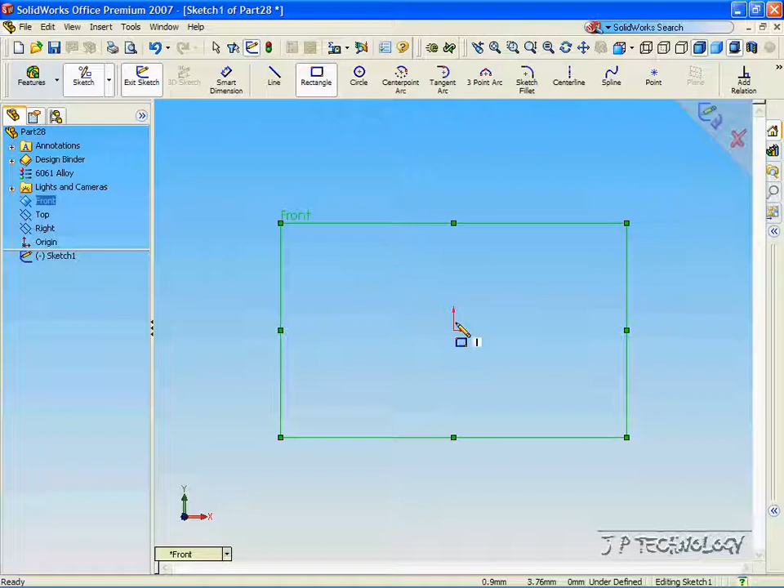Now to start off, let's make a shape that we will put all of our holes into. Click Sketch, click Front Plane, click Rectangle, select the origin, and select a point outside of it. With the smart dimensioning tool, let's make this dimension 100, and let's make this dimension 200.

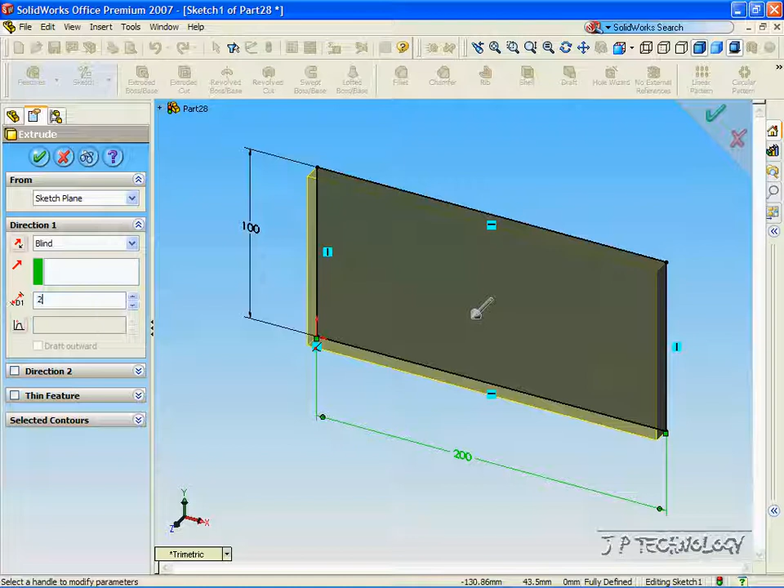Now let's click the feature, extrude base, and let's make it extrude out 20 millimeters. Click OK. Now we have our part that we're going to make all of our holes in. Now let's click the front view and click the front face.

Now let's click the Hole Wizard function, and with the Hole Wizard we're able to select a counterbore, countersink, a hole, a tap, a pipe tap, and a legacy hole. For now we're going to start off with the counterbore. So let's click this type, and through all the options you're able to select what kind of hole you want to put in, what kind of caps you want it to have.

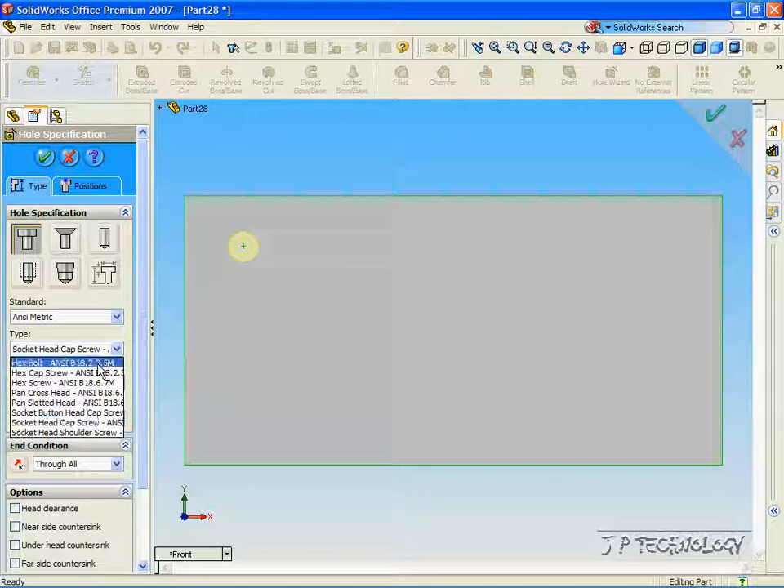If you want it to have a hex cap, if you want it to have a socket head, it's up to you. And you're able to select the size. For this one, let's select M12, and then the fit. And you can choose close, normal, or loose. For this, let's just click normal.

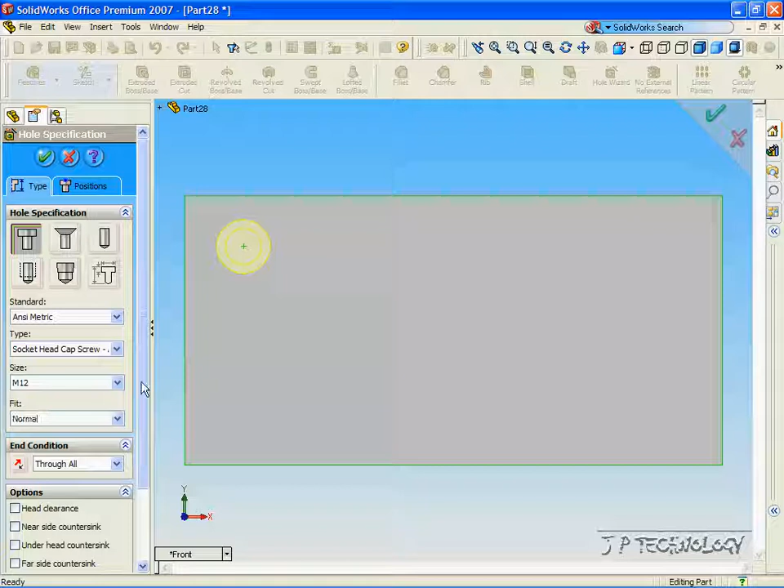And you're able to select if you want it to go through all or up to a surface. For all the ones that we're going to make, we're just going to select through all. So click through all. Now click the position tab.

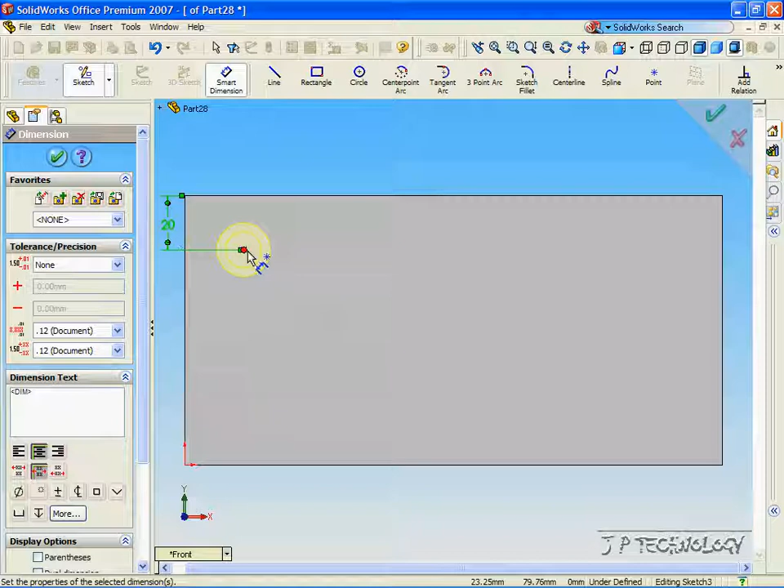Click smart dimension. And let's click the center of that to the outside, and let's make it 20 millimeters. And from the center to this line, let's make it 20 millimeters. Click OK. Click OK again. And now we've cut our hole through the part.

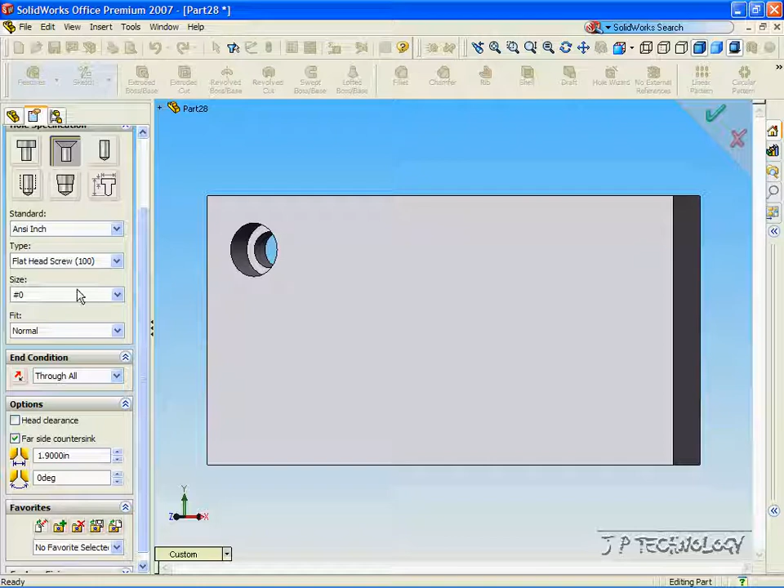Now let's click Hole Wizard again. This time let's make a countersink hole. And for this, again, we can select all the different sizes, how we want it to work. Now let's click position. Click a position on the part with the smart dimensioning tool.

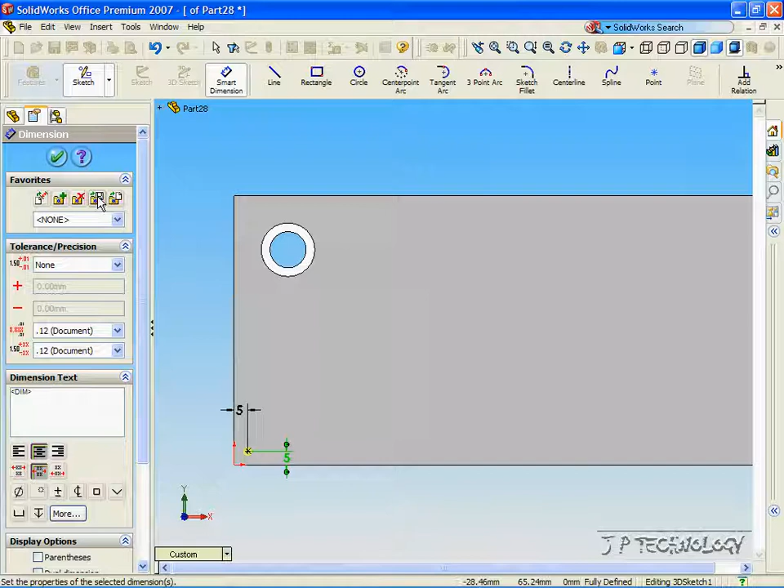Let's make this 5 and make this 5. Click OK. Click OK again. And now when we zoom in, we can see our hole.

Now click Hole Wizard again. This time we're just going to make a normal hole. And for the size, let's make it 17. And for the condition, let's make it go through all. Now let's click the position tab and click a position on the part.

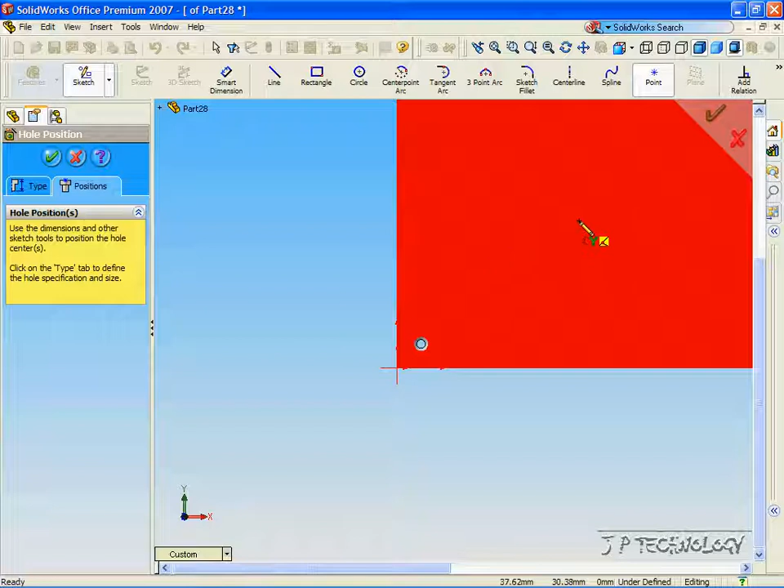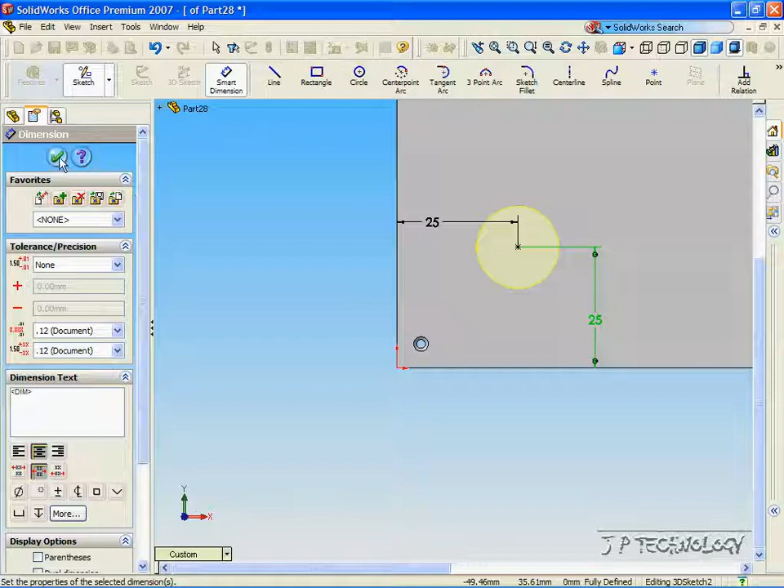With the smart dimensioning tool, click the center, click this line, make it 25, click this line and click the center, and we'll make this 25 also. Click OK. Click OK again, and now we've made a hole right through.

Now click Hole Wizard again, click the tap. Now the tap is going to be a blind. The tap is a pre-cut hole if you want to do a drilling or if you want something else to go into it. So let's make it blind, and let's make it go in just 5 millimeters.

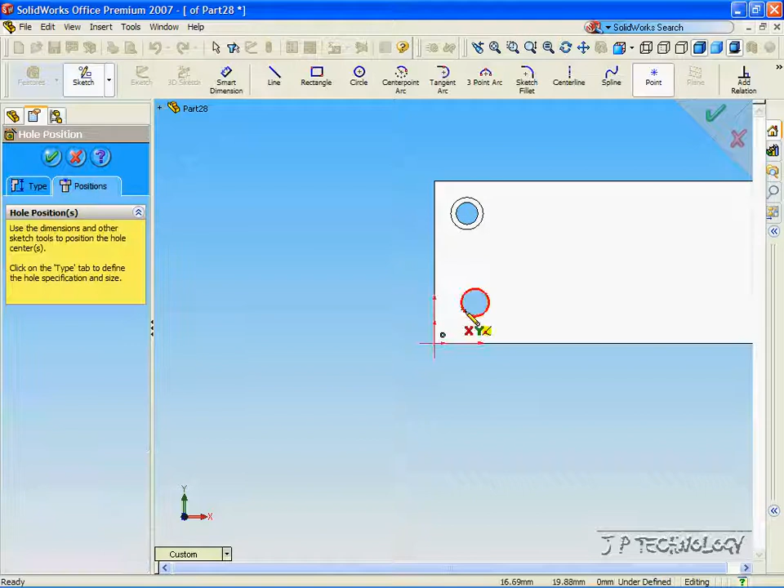Now let's click the position, click it right there. Zoom in, and with the smart dimension, let's make it 5 millimeters from the edge. Click OK, click OK again, and now when you zoom in, you can see the tap goes in 5 millimeters.

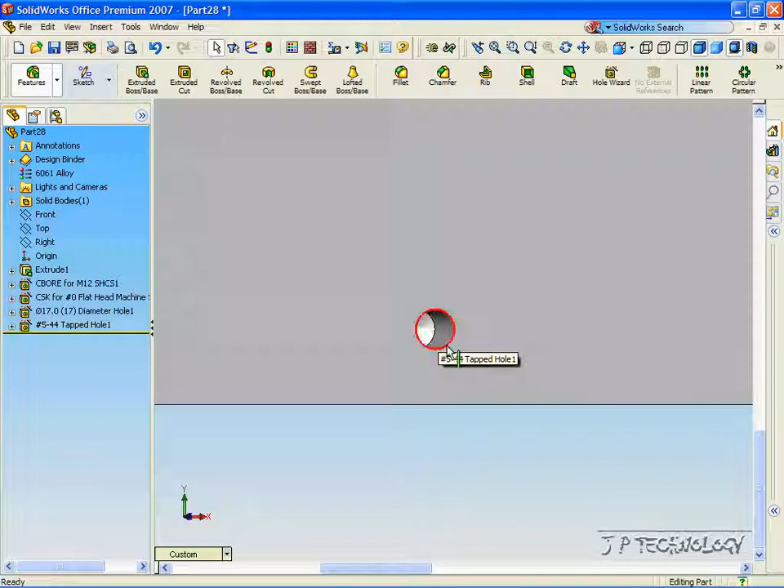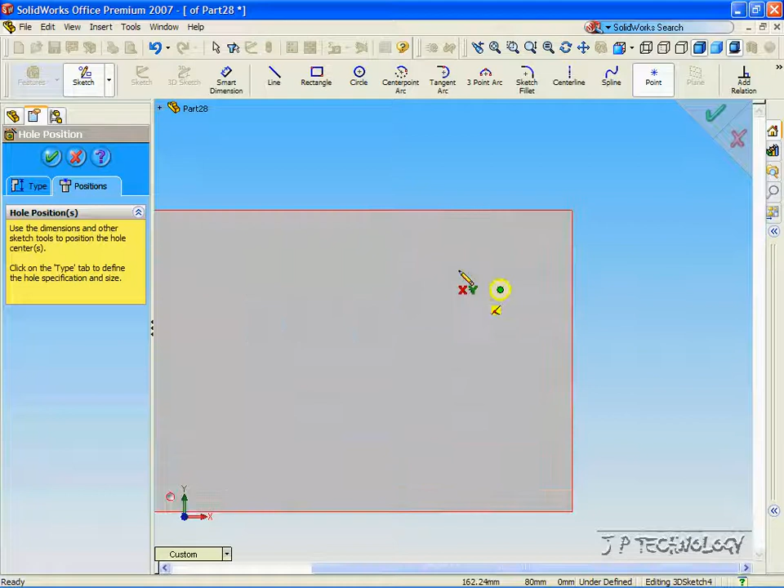Click Hole Wizard again. This time we're going to make a pipe tap. And the blind, we're going to make it 10 millimeters. Click Position. Click a point on the part. Zoom in. With the Smart Dimensioning, let's make it 10 and 10. Click OK. Click OK again. And now we can see that we made a pipe tap.

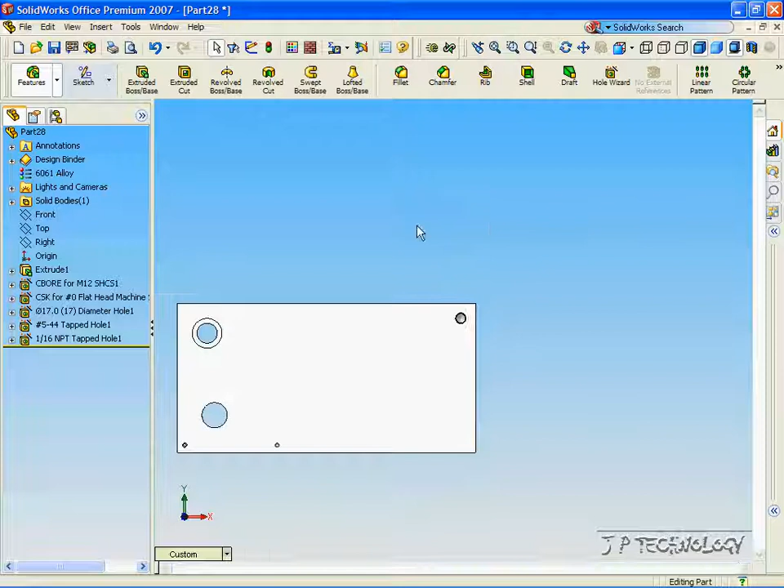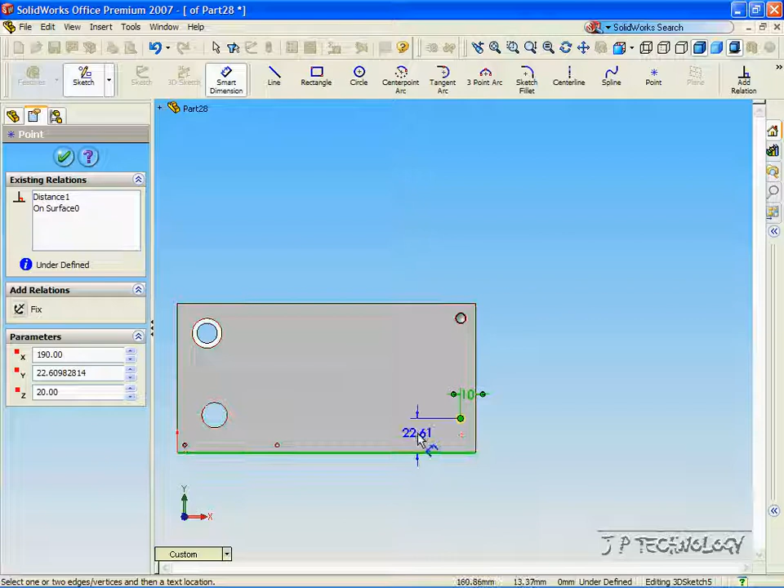Now click Hole Wizard again. And let's make the legacy hole. Click Position. Click the Smart Dimensioning tool. And we'll make this 10 and 10 also. Zoom in, click OK, click OK again, and we made our legacy hole. And this concludes our tutorial with the Hole Wizard function.